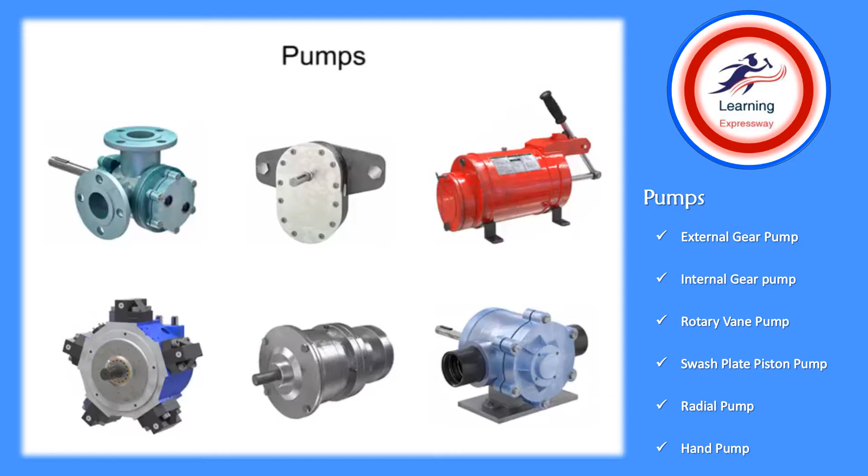Many different types of pumps exist to assist fluid movement in a variety of systems. An external gear pump uses two gears rotating against each other to provide fluid movement.

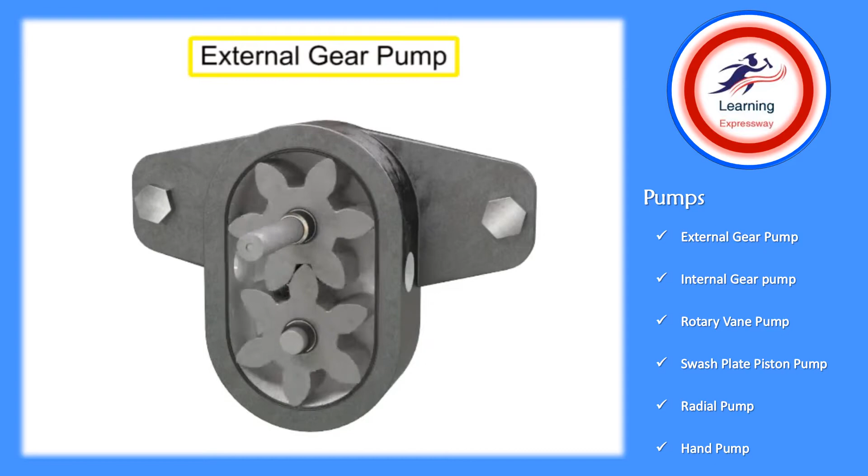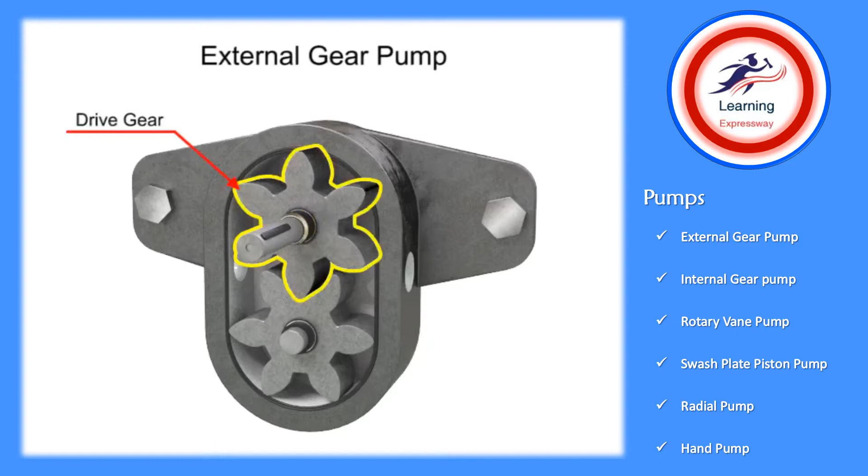One gear is driven by a motor connected to a shaft. This is called the drive gear because it is driven by a motor, and it in turn meshes with and drives the movement of the second gear.

As the gears rotate away from each other and come out of mesh, they create an expanding volume on the inlet side of the pump. This creates a vacuum at the inlet port, allowing fluid to flow into the pump.

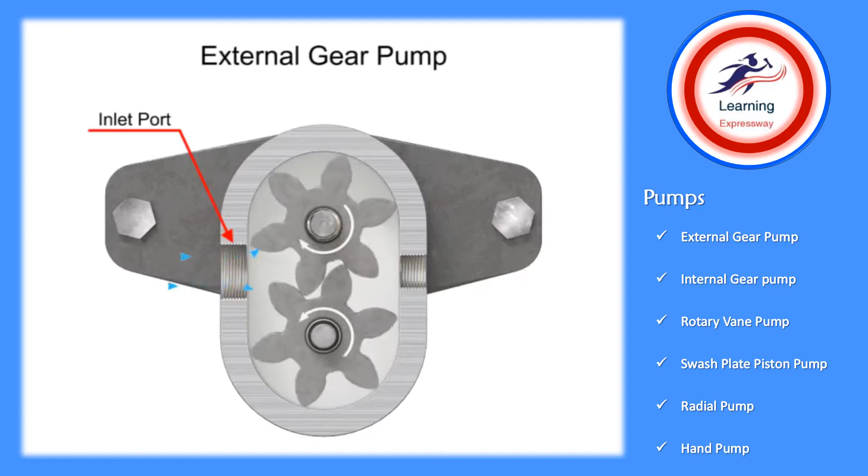Then fluid flows into the cavities and is trapped by the gear teeth. As the gears rotate, a flow path is created around the outside of each one. Fluid trapped in the slots between teeth is carried around and discharged into the cavity with the outlet port.

Meshing of the teeth in the center of the pump seals the outlet port from the inlet port. No fluid passes between the gears.

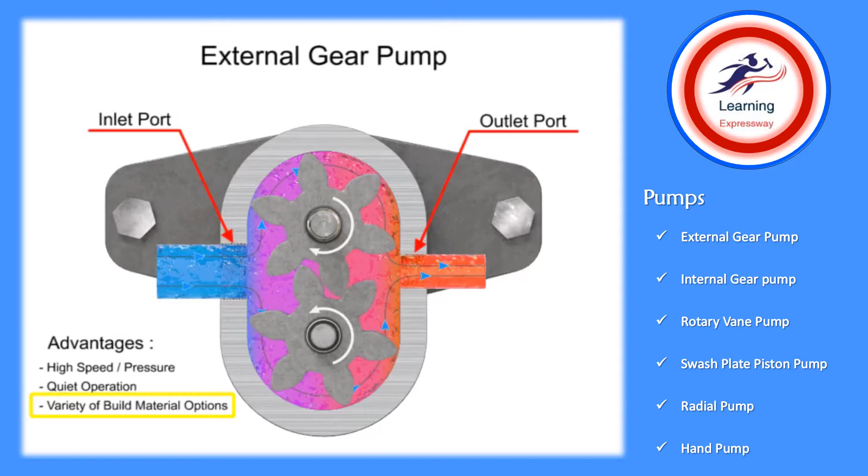The advantages of external gear pumps are their high speed and pressure, relatively quiet operation, and that their design accommodates a wide variety of materials. Disadvantages include bushings in the liquid area can become worn and that they have fixed end clearances.

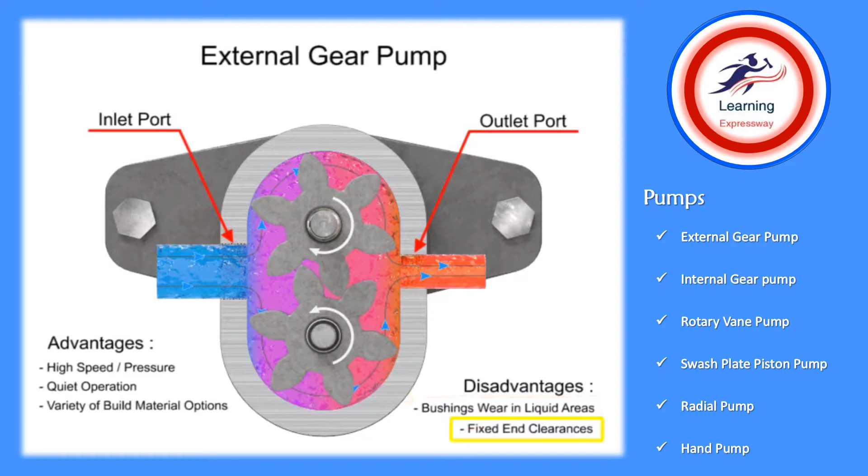Internal gear pumps are exceptionally versatile. This type of pump has one inner gear which is inside a second outer gear. The inner gear has a shaft driven by a motor and has teeth that protrude outward. The outer gear has teeth that protrude inward toward the center of the pump.

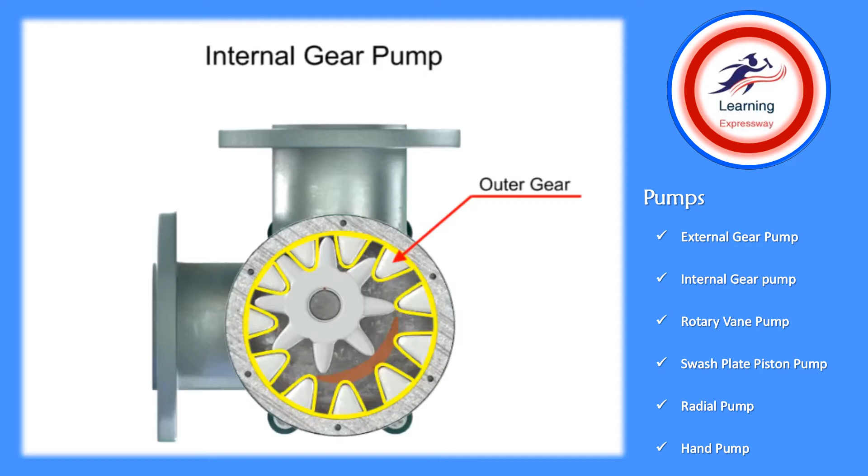As the inner gear rotates, it meshes with and moves the outer gear. Liquid is trapped in the gear spaces and carried from the inlet to the discharge. A stationary crescent-shaped divider separates the intake and discharge portions of the fluid.

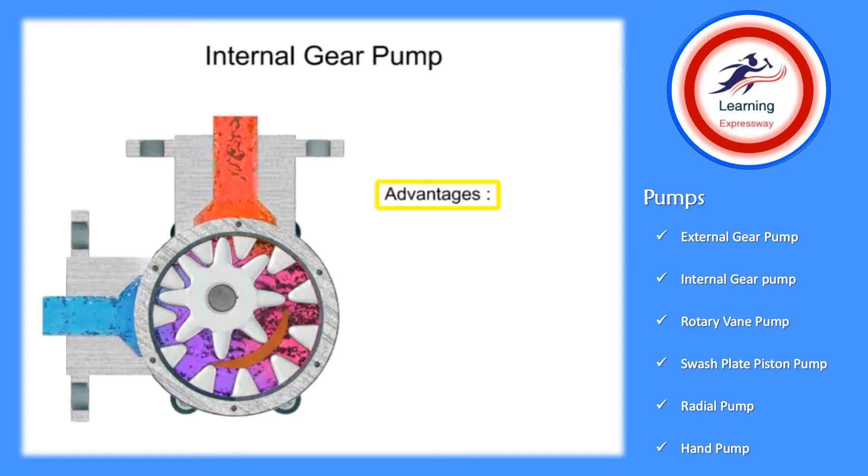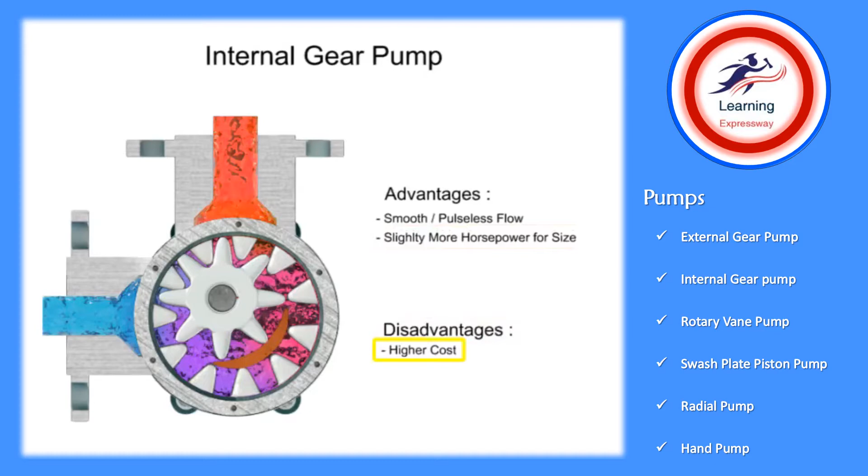Advantages of internal gear pumps are a smooth and almost pulseless flow, and slightly more horsepower for its size. Disadvantages are its higher cost, limited size range, low to moderate pressure ratings, and few sources of manufacture.

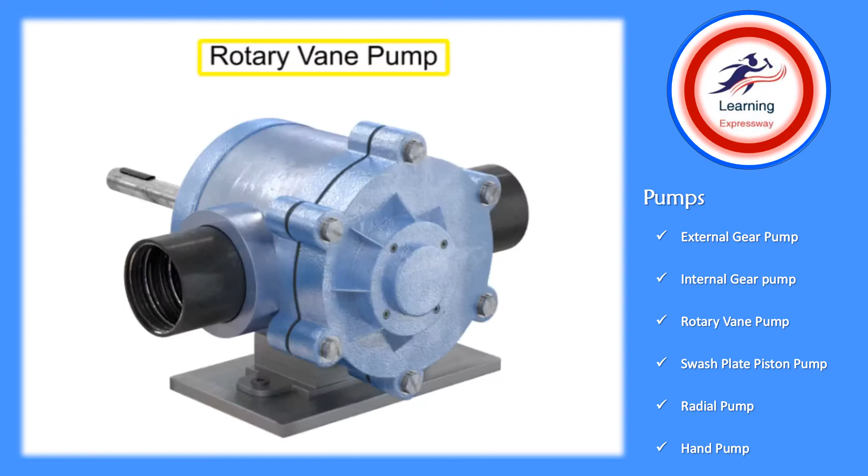A rotary vane pump is a positive displacement pump that consists of vanes mounted to a rotor. The vanes are on an off-center drive shaft.

As the shaft rotates, the variable length vanes slide in and out to maintain contact with the pump housing. The tension in the vanes is maintained by either springs or hydraulic pressure. As the vanes rotate, they create chambers of varying sizes within the pump.

Fluid enters at the largest chamber. As the vanes rotate and retract, the chambers get smaller, forcing fluid to exit through the discharge port.

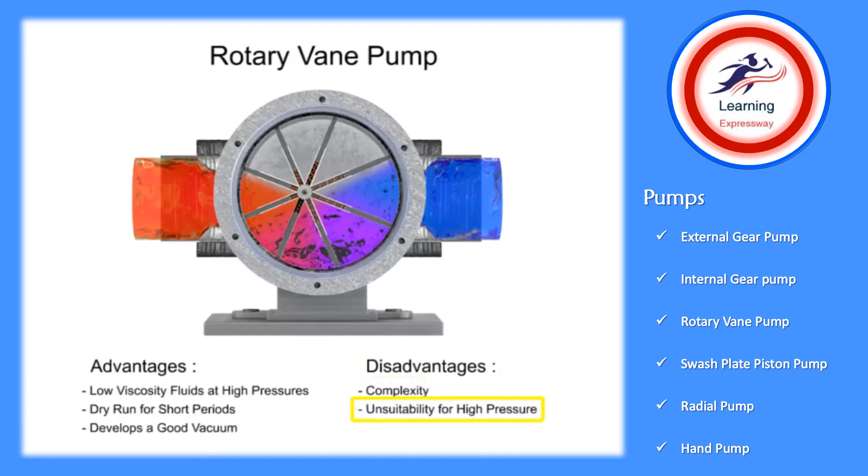The advantages of vane pumps are that they can handle low viscosity fluids at relatively higher pressures, can dry run for short periods, and develop a good vacuum. Their disadvantages include complexity and their unsuitability for both high pressure and high viscosity fluids.

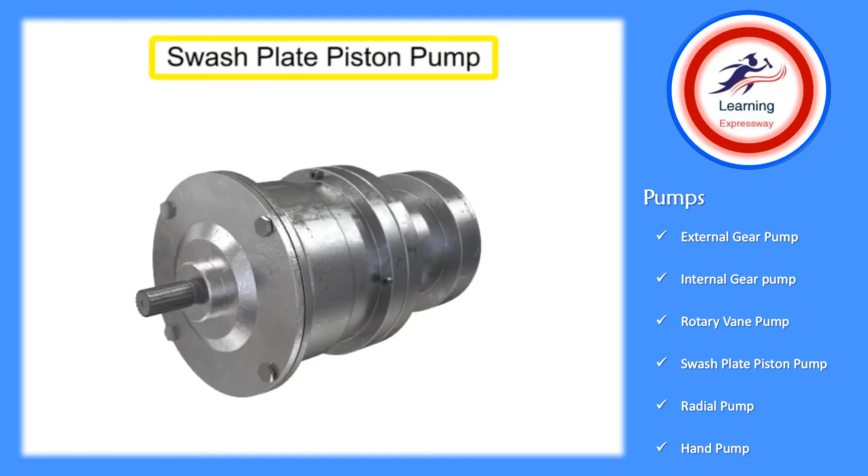Piston pumps come in many different forms. A swash plate is a device used to translate the motion of a rotating shaft into the reciprocating motion of a piston.

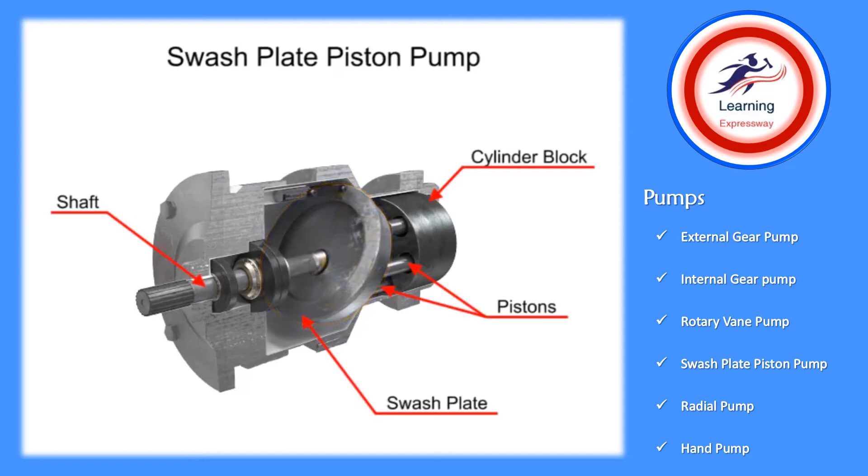Swash plate piston pumps have a rotating shaft connected to a cylinder block containing pistons, which are pressed against a stationary swash plate that sits at an angle to the cylinder. As the shaft rotates, the pistons move against the swash plate, causing them to reciprocate within the piston block.

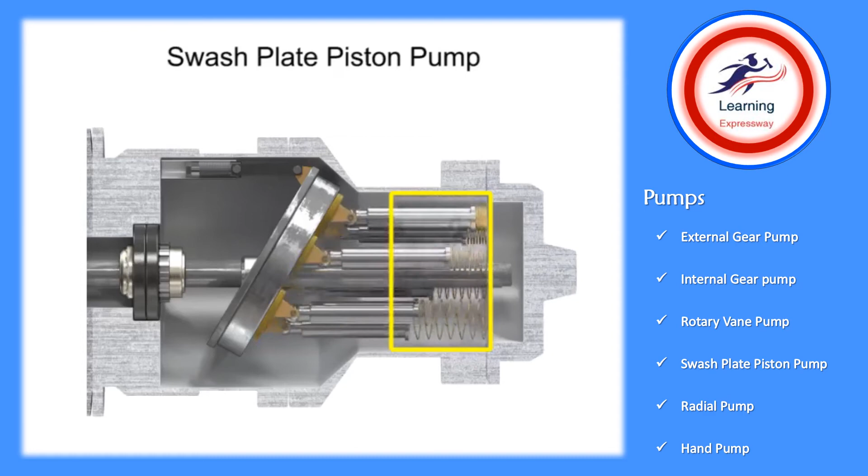The pistons create a vacuum that forces fluid in during half a revolution and expels fluid during the other half.

On the intake stroke, a spring ensures the pistons pull back and maintain contact with the swash plate, causing fluid to fill the empty cavity left behind.

On the discharge stroke, the angle of the swash plate forces the pistons back inside the piston block and discharges the fluid. The greater the slant on the swash plate, the further the pump pistons move and the more fluid they transfer.

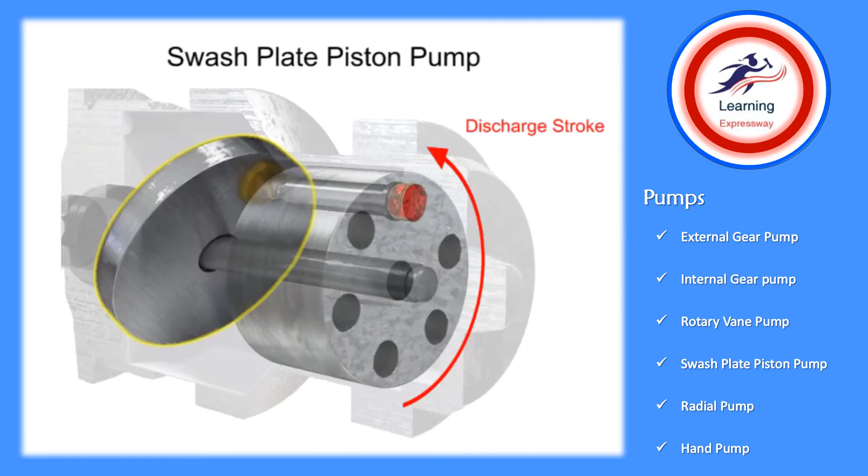Piston pumps, in general, are manufactured with closer internal fits than other pumps. This means that internal slippage can be less, so that they operate with reasonable efficiency at pressures both too high or too low for the operation of other pumps.

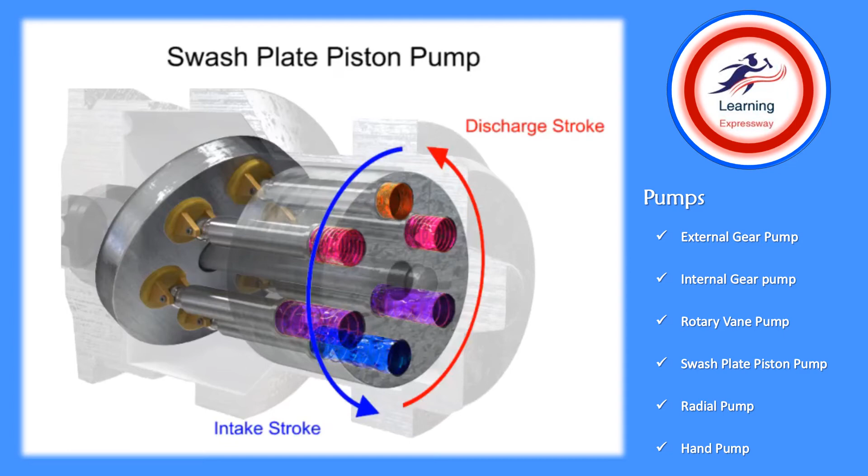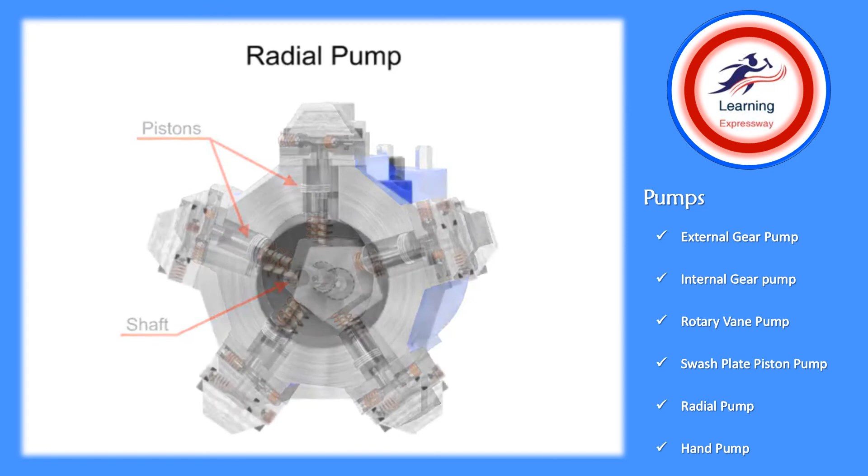Radial pumps are designed so the pistons stroke in a direction at right angles to the shaft. The pistons are arranged like wheel spokes around a cylinder block with an eccentric central cam mounted on a driveshaft.

As the shaft rotates, the cam moves towards the pistons, forcing them down into the cylinder block and discharging the fluid. As the cam moves away, springs help retract the piston and cause the intake stroke. Check valves ensure that fluid only enters the inlet ports and only exits the outlet ports.

Radial piston pumps have a low noise level, very high loads at low speeds, and high efficiency.

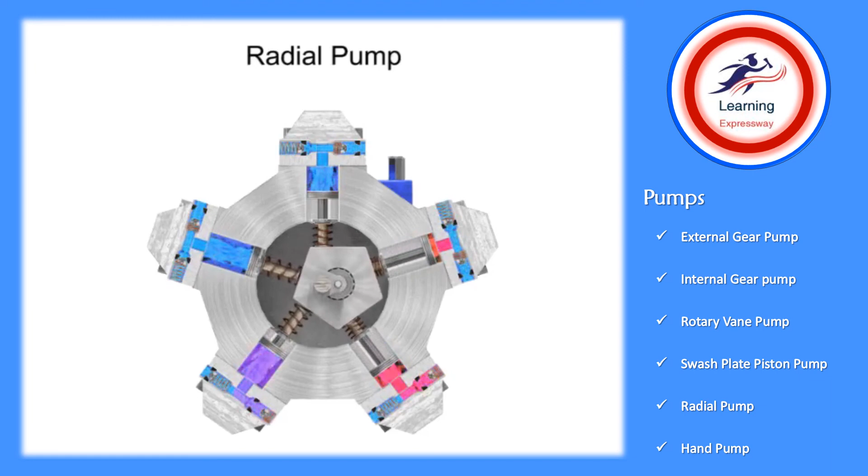Hand pumps are used when a source of power is not available or where the extra expense of a power pump isn't warranted. For example, they are used on shop presses and other portable equipment, serve as standby pumps, and serve as sources of emergency power.

Hand pumps are always of piston type and are usually constructed with a piston working between two check valves.

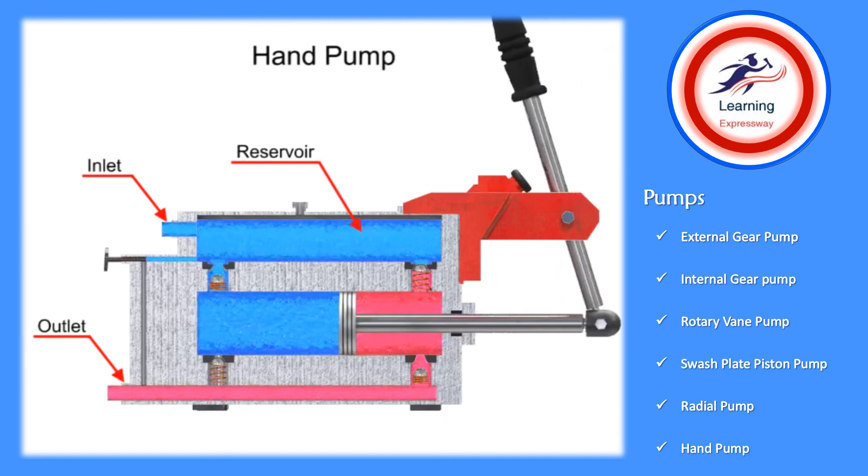Double-acting hand pumps are more efficient, allowing fluid to both enter and discharge on both strokes of the piston. Moving the pump handle in either direction allows fluid to be drawn in from the reservoir and discharged via the outlet ports. Check valves in all locations prevent fluid backflow.